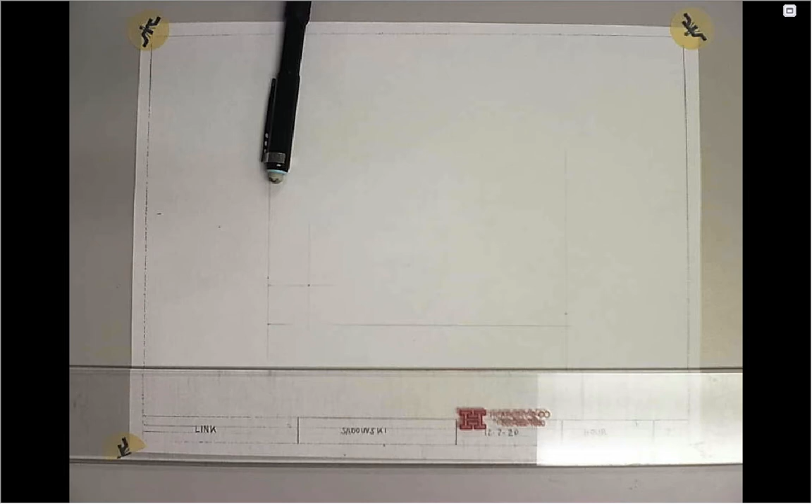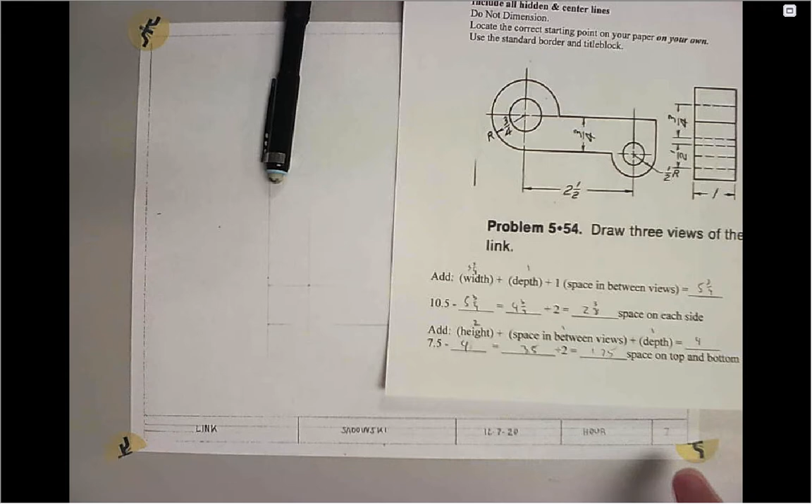Right. So, I'll demonstrate drawing number 7, the link, for you. Okay, 7, link. So be sure you're putting these titles in here. Now, when they have an actual name or a title to them, be sure you're putting that in there. And the number just goes down in the number box there.

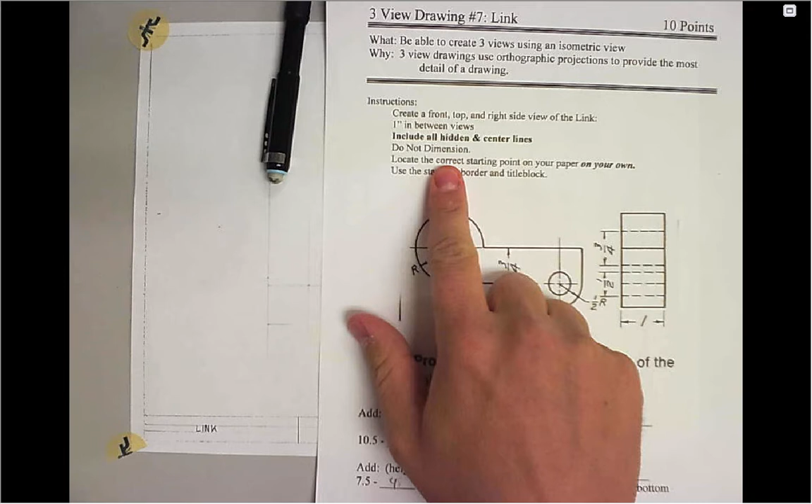No isometric on these. Okay, remember, no isometrics. You don't have to include the dimensions on here, but you do need to have all the hidden lines and now center lines, because now we have circular objects on here, so we have to have center lines included on here. So I'll show you how to do that one.

I centered it, kind of straightforward. Here's all the stuff if you want to see my numbers on there from top to bottom to figure out how to center that thing. The one thing I do want to mention is that when you use this centering technique, that gives you a corner, right? Remember we had a corner that we got to? There's no corner here. So basically what you're finding is where this would go to line up with the bottom over here. So it's getting us a corner right over here.

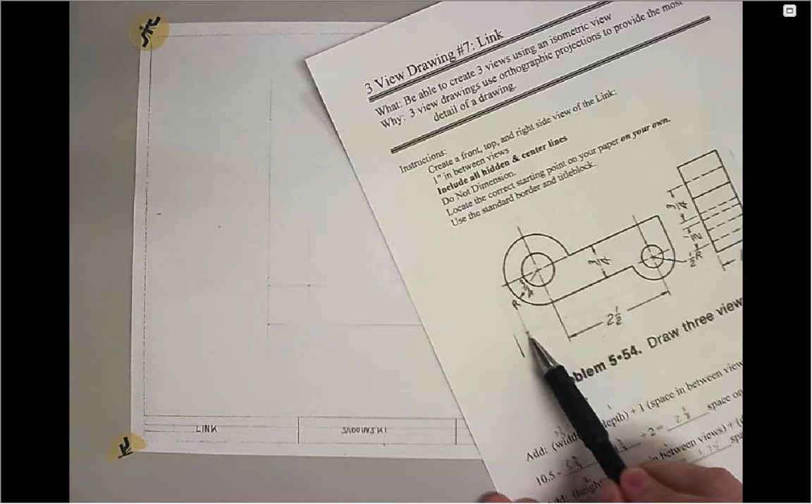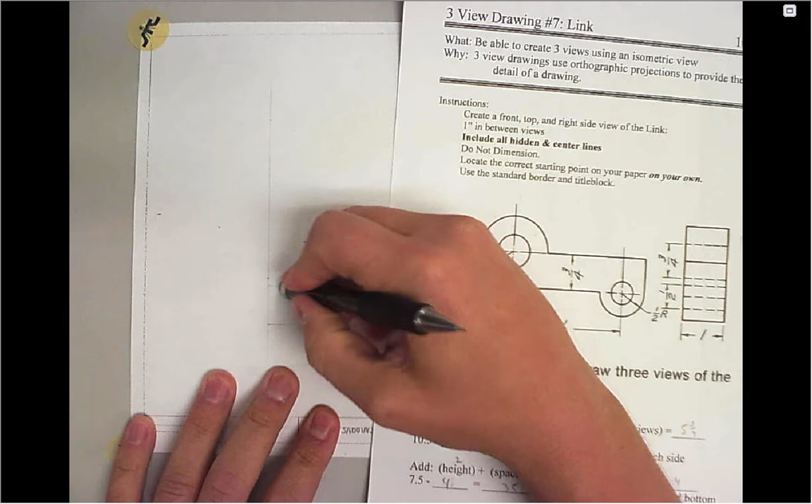So you can see I moved over to get my center to then start. Actually, now that I'm looking at it, this center is going to be wrong for my height there. So that's where I'm going to start now. Kind of show you guys how to do this. So like we said, we went over this way, right?

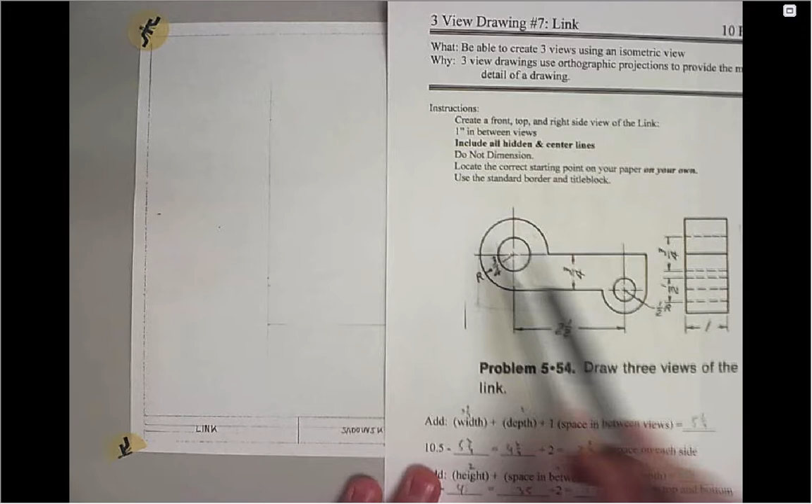And then up. Now, one of my issues here is going to be I have a 1/2 inch from here to here. And from the bottom here, I have 3/4. So I'm going to go up a 1/2 and up 3/4. So up my 1/2, up 1, 2, 3/4. There it is. So that's where this one goes. And I am going to be those 3/4 of an inch over. Right there.

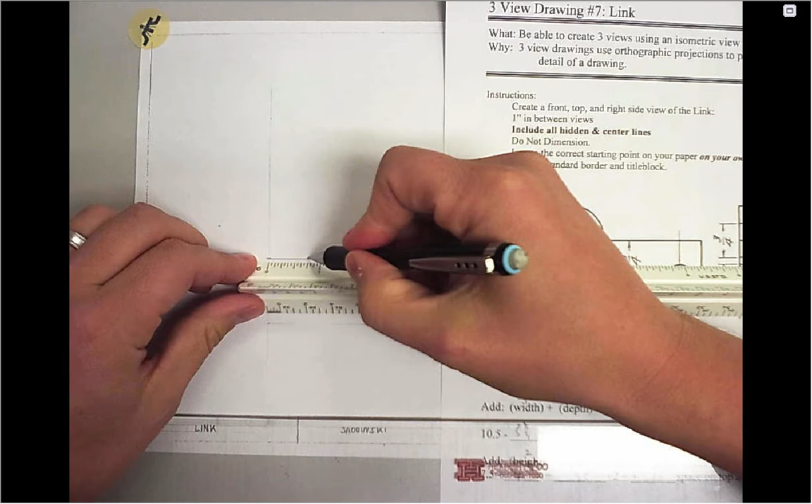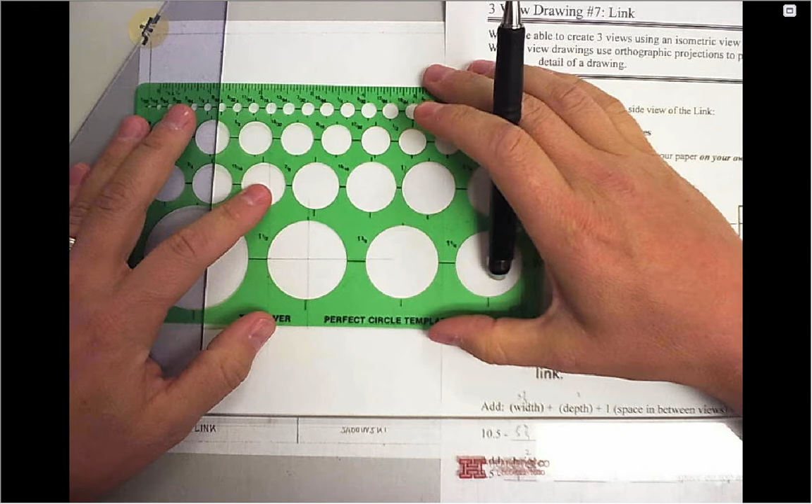Do these really lightly because these are going to help me get the center lines for my circle template. So circle template, I have a 3/4 radius. So that's going to end up being 1.5 inch diameter. Right here. I'm going to line up all my lines. There's some neat. And I got a lot of this one, so I'm going to go all the way around. Right there.

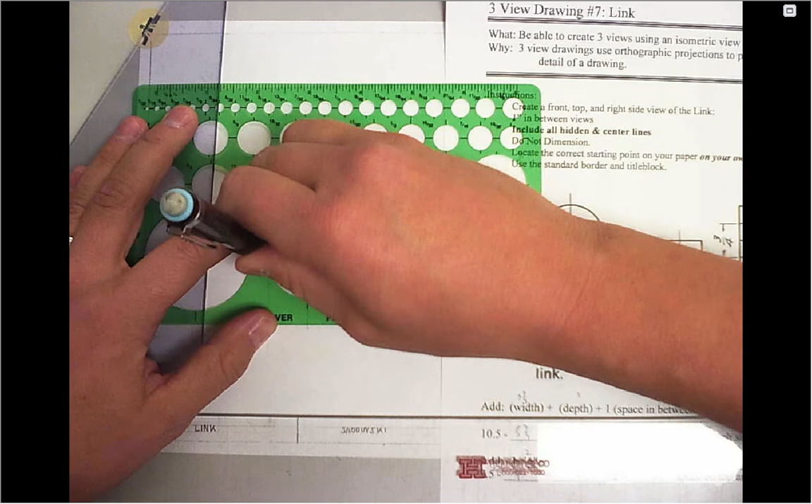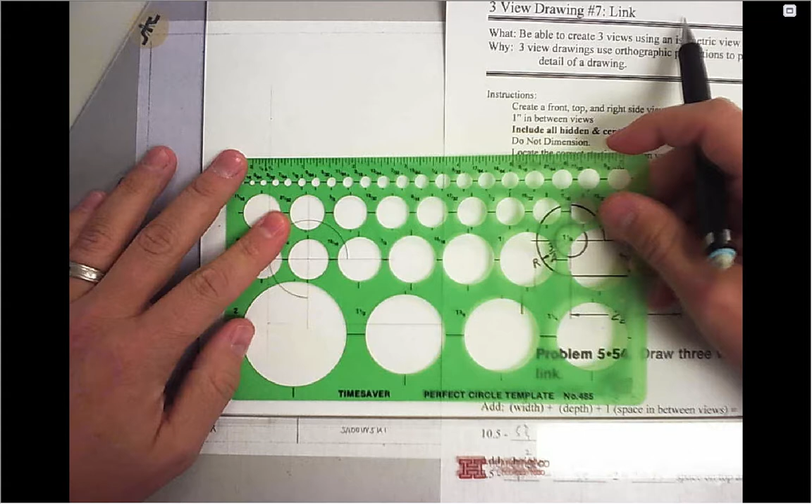Okay. Also, on this interior here, I've got a 3/4 of an inch diameter hole going through. Got 3/4 of an inch right here. You need to know the difference between your radius and diameter, not only for this drawing, but in this class as well. This. And now, this can go lightly forward. And this one, all the way to the end.

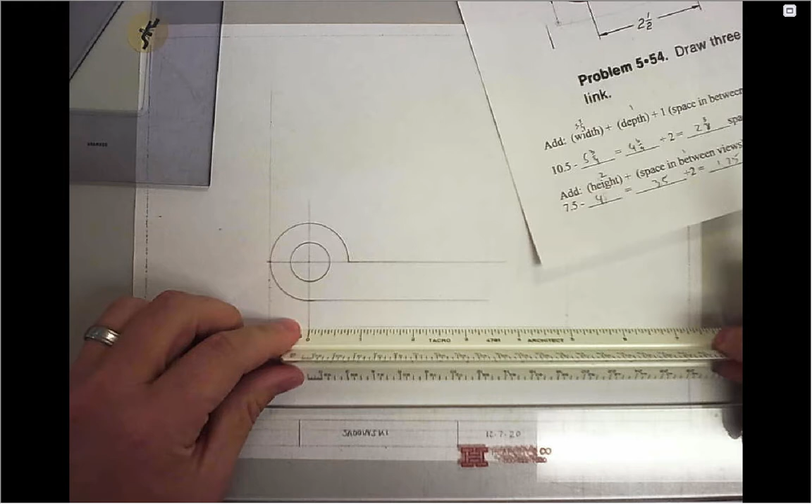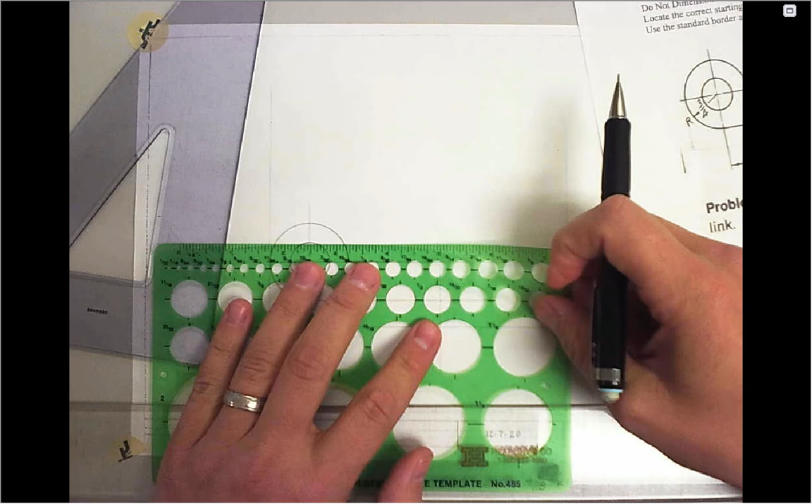Okay, now, I'm going to go 2.5 inches over. There's going to be my center for this arc and this circle. So this circle down here is a 1/2 inch diameter and a 1/2 inch radius. So template, we got 1/2 inch diameter right here. Then I got a 1/2 inch radius, which means it's 1 inch. So line all these up.

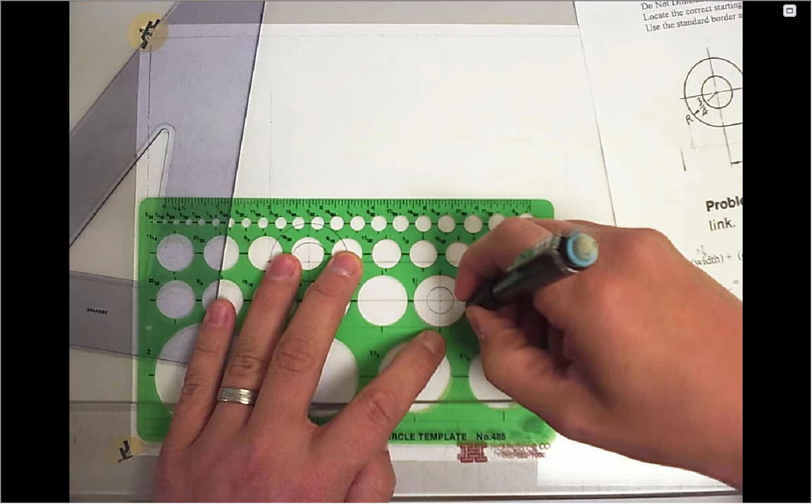Okay. Go straight up here. Now the nice thing about this drawing is it gives you 2 of the views. The beauty of it. So now I just have some erasing to do. Okay. The beauty of it is it shows you exactly what your right side view is going to look like. Isn't that nice?

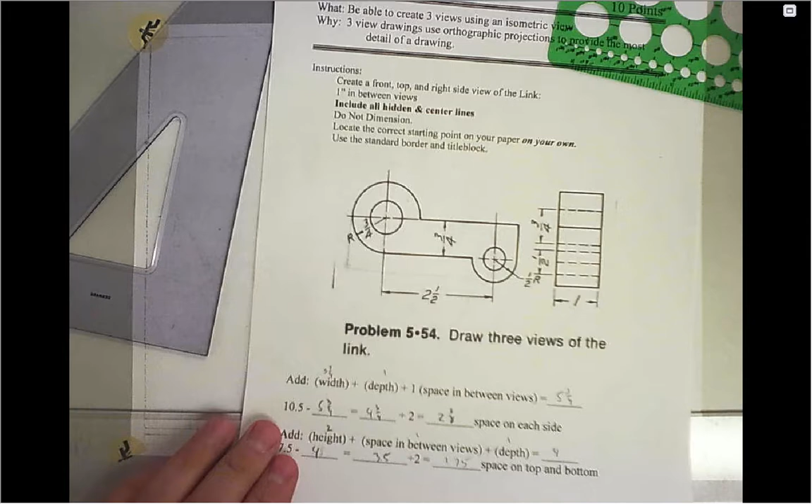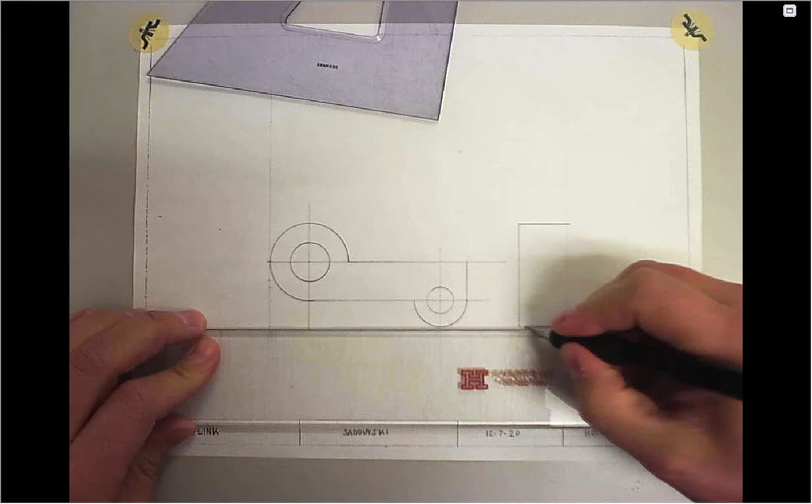So I'm not going to do this one in its entirety, really. Maybe I'll fly through it at the end. I want to do the top so it can help you guys figure out the top there. This one shows you exactly what it's supposed to look like already, so you shouldn't need Sadowski to show you how to draw that. I will fly through it here in a second, but I'm going to do the top view, though, because that's the one that's missing for you guys.

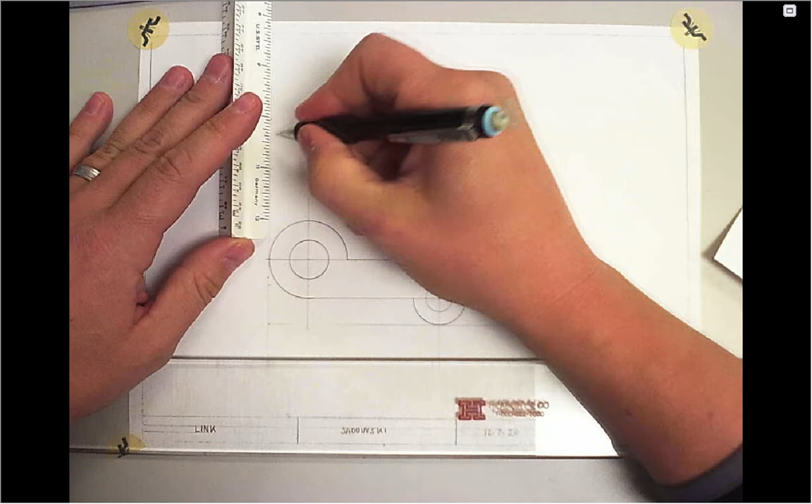1 inch in between my view. It's 1 inch wide. So looking down at the top of it, this thing's going to look like a rectangle. Line it up right there. Project that endpoint up there. Looks like I missed a little bit. Okay, now this side is going to look like an edge where this curve comes along, so this will look like a line up there.

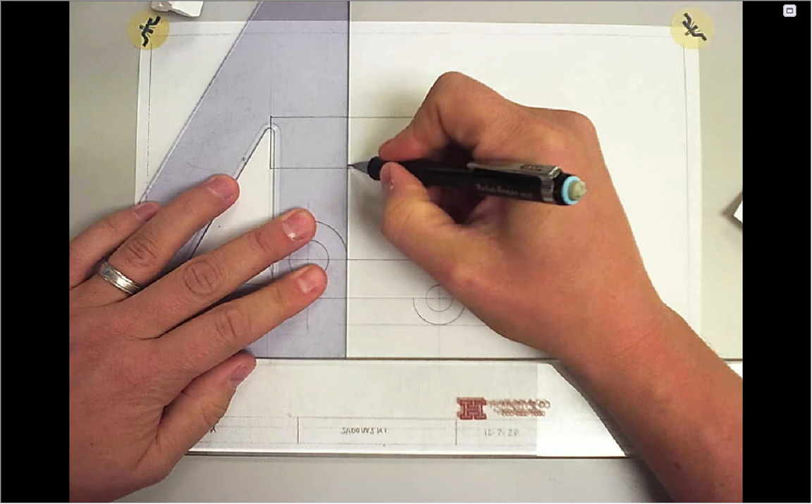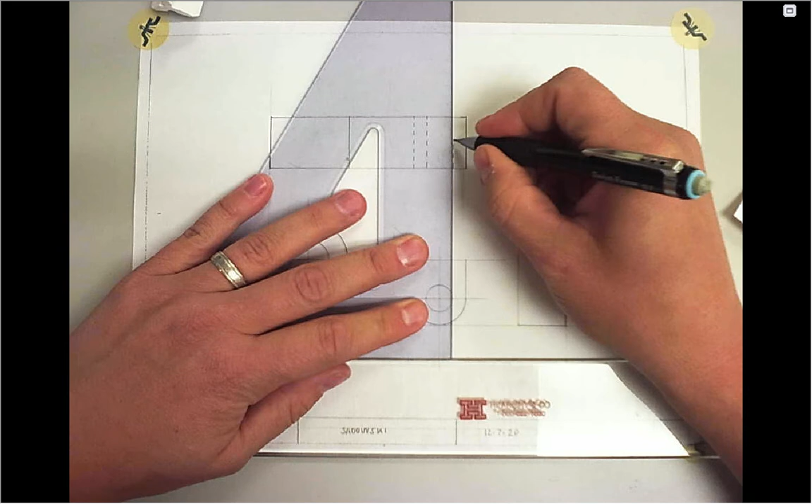Okay, this will be a hidden line down there. Hidden line for the cylinder of this hole. Hidden line for the other edge of the cylinder of this hole. And center line. Let's line up that center line. Long, short dash, space, and then long.

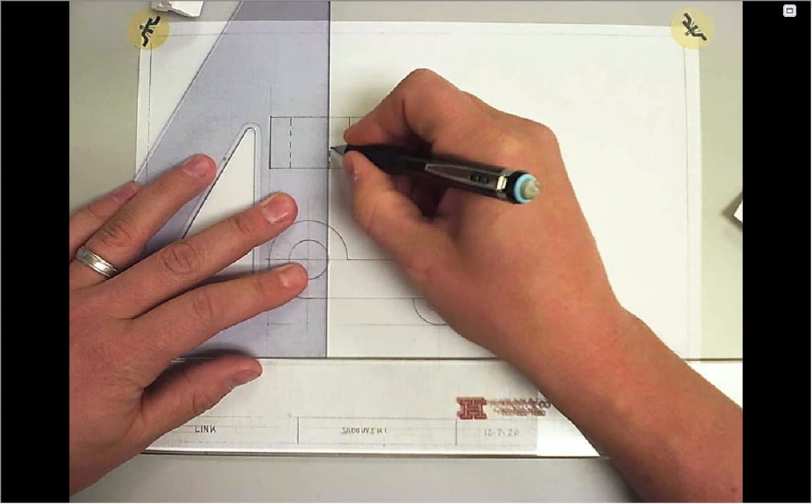Okay, over here, kind of same thing. This is what a hole looks like. You're looking at it from the side. See the two edges of that hole, and the center line. Remember, later on we can use that center line because we can dimension off of it. And then, pretty simple over here, we've got an edge back in here, which is going to end up being a hidden line, which I'll describe for you here in a second. We got a hidden line right here, the bottom of the cylinder.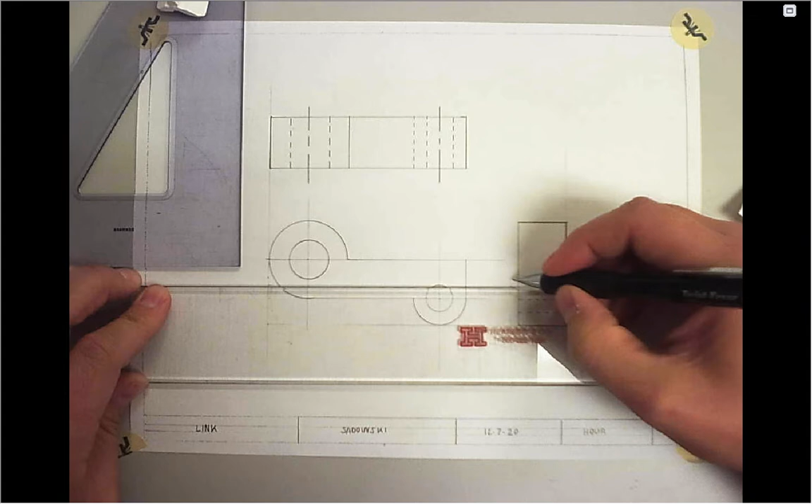Now, what do we do when lines overlap? Meaning we have a center line on this hole right here, then we have a hidden line. Well, that's called precedence. What takes precedence, or what is more important? What should come first? In this situation, a hidden line takes precedence over a center line. So if you have two lines, the one that takes precedence over all of them are edge or solid lines, then hidden lines, then center lines.

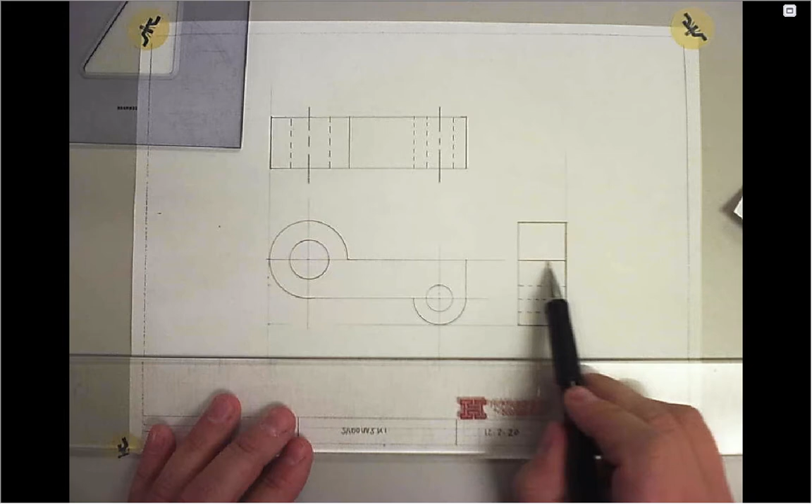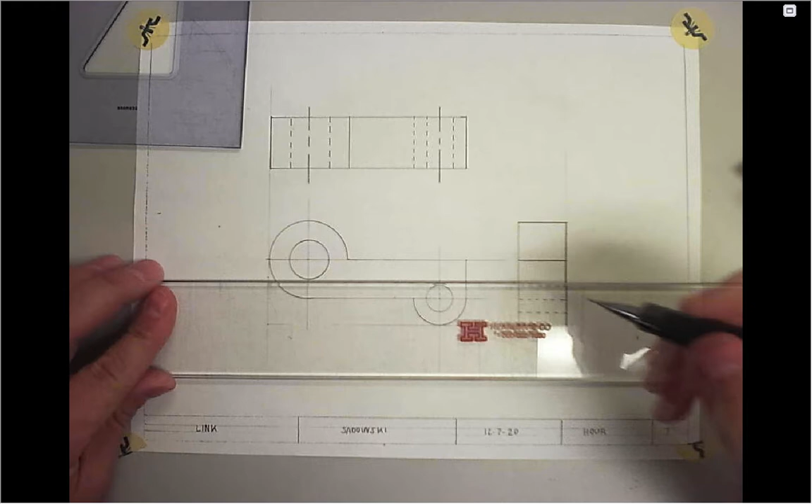So that's the reason why you're not going to see any center lines on this right side view here, because you have other edges or other lines overlapping it. So we put the center line here to mark the middle of the hole, so that the person looking at this knows that this is a cylindrical hole going through here. But when we would originally have a center line right here, and we have a hidden line also overlapping right on top of it, the hidden line takes precedence, so that's what goes in there. This is going to be really close. And top of this one.

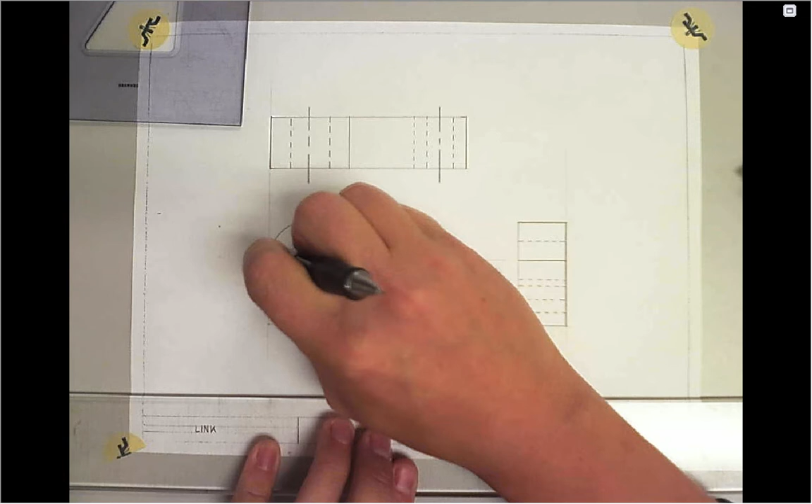Okay, for center lines, what I'm going to do is I'm just going to keep these that I was using, and then erase right here, erase right here, erase right here, erase right there. There's my center marks. Bring this one down, bring this one down. They're supposed to extend about 1/8 of an inch outside the circle or arc. I'm not going to get that technical. When we get on the computers, it automatically sets them for you. That one's kind of short, so maybe I'll make that one a little bit longer.

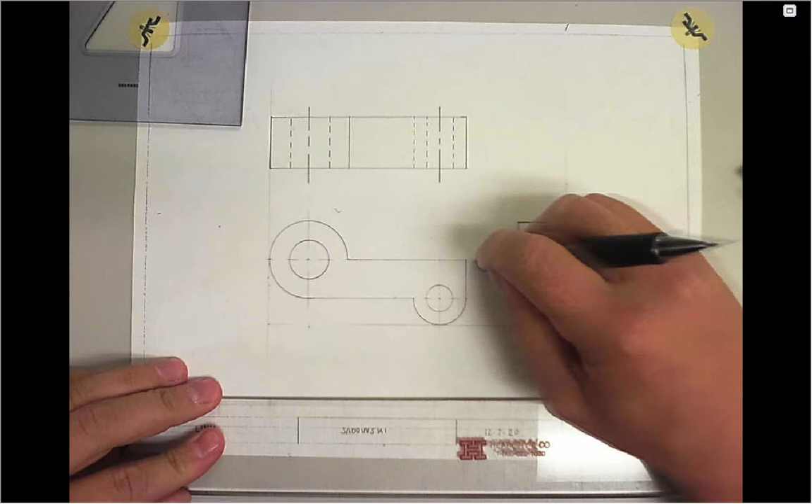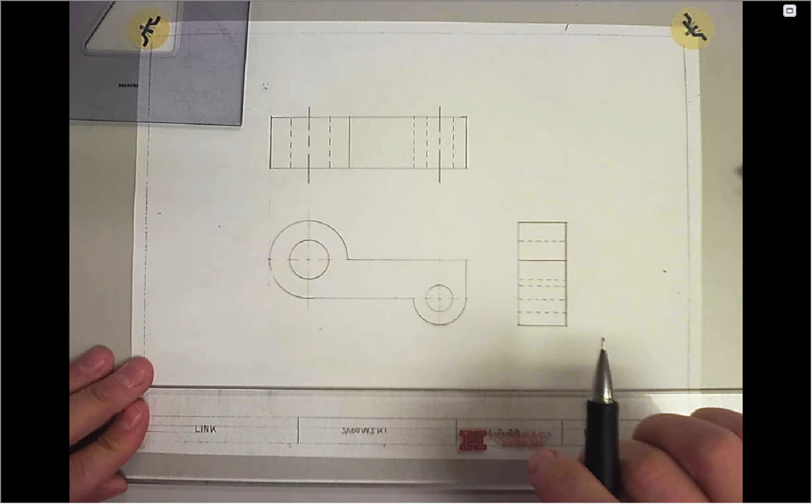But then we go and we erase all of this stuff, right? Don't need these extension lines anymore. These are gone. Okay, line weight for them, they're usually a little bit lighter, the center lines especially. But I would now go in and darken in some of these other lines a little bit, so that my drawing was a little bit more uniform. But that is how you do drawing number 7.